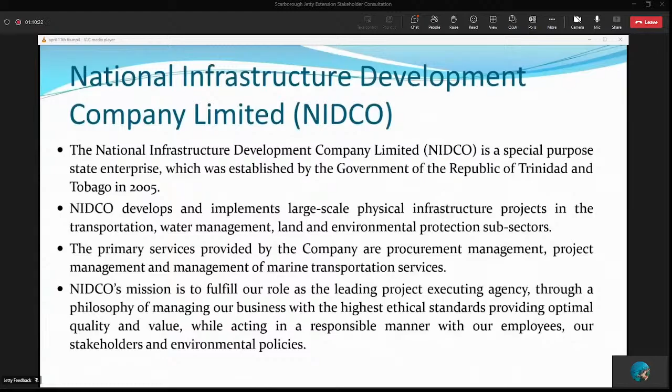Now we will present you with an introduction on the project itself. The government of the Republic of Trinidad and Tobago, through the Ministry of Works, is desirous of constructing a guide jetty at the Port of Scarborough in Tobago, in an effort to increase the berthing infrastructure at the port.

NIDCO was appointed by the ministry to act as the employer. CEP Limited was engaged by NIDCO to provide all the necessary engineering design services for the development of the conceptual designs for the guide jetty.

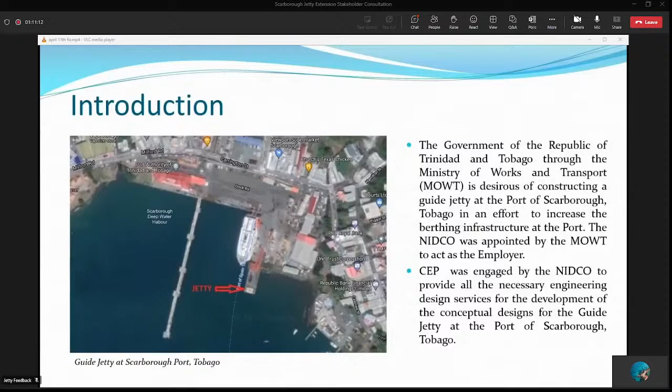Now, why are we here? The purpose of the meeting is twofold. We will be sharing information and creating awareness of the project among our key statutory and regulatory stakeholders so that we can open lines of communication with you. We're also expecting to obtain feedback, comments, and concerns from you on the proposed guide jetty at the Scarborough Port.

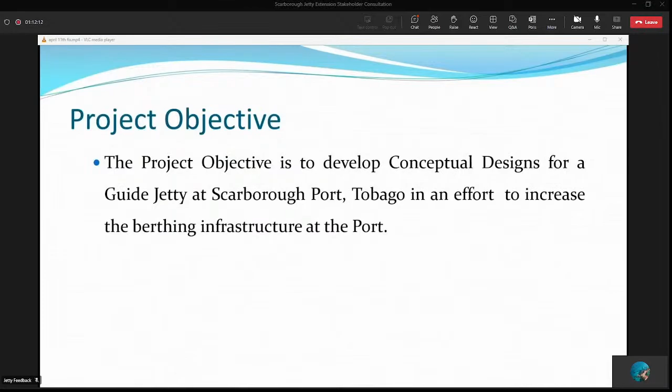Again, just a reminder of the objective for this project. The objective of the project is to develop conceptual designs for a guide jetty at Scarborough Port in Tobago, in an effort to increase the berthing infrastructure at the port.

The proposed site for this project will be at the southern end of the existing quay wall at the Port of Scarborough, which is due east of the cruise ship jetty.

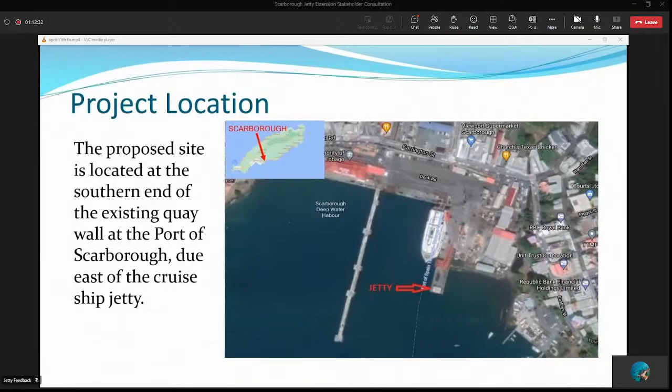Now let's look briefly at the goals of the project, which are: one, to increase the berthing infrastructure at the port; two, to provide a conceptual design for a guide jetty at the Scarborough Port; and three, to provide an assessment of all the potential environmental impacts that may occur as a result of the proposed project.

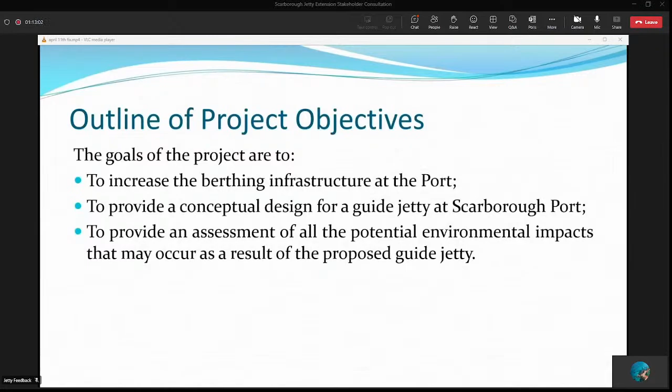And now we would like to hand over the rest of the presentation to CEP Limited. The introduction will be done by Kathryn Arjoon, who is the design consultant on the project. Good day all. My name is Kathryn Arjoon. I am the project engineer from CEP Limited.

CEP Limited was awarded the contract for the conceptual design of the guide jetty at Scarborough Port in Tobago by NIDCO. Today I will be introducing CEP Limited and its team of sub-consultants.

Firstly, I would start with giving you all a brief history of CEP Limited. CEP was founded in 1955 by a British engineer, Mr. David Key. Mr. Key decided to sell the company in 1973 to locals. Now CEP is fully owned and managed by nationals of Trinidad and Tobago.

Currently, CEP consists of project managers, civil engineers, and structural engineers who have a collective experience of over 150 years. CEP's staff consists of 33 employees: 14 engineers, 9 technical staff, and 10 administrative staff, who are all full-time employees.

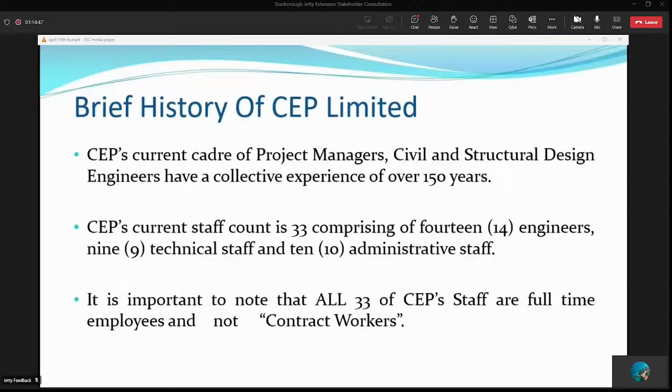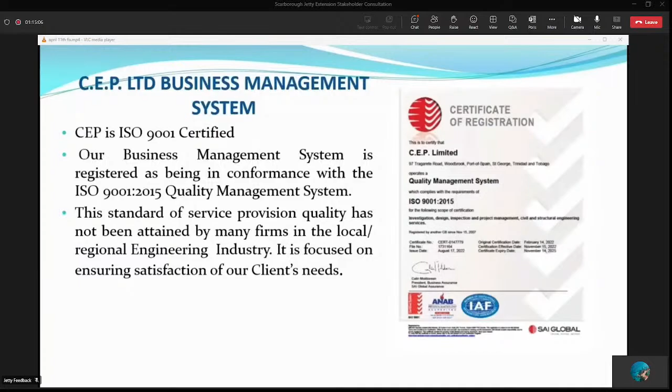CEP Limited's business management system is registered in conformance with the ISO 9001 Quality Management System, a certification which is not attained by many local/regional firms in the engineering industry. Our company is also compliant with the STOW-TT, or the Safe to Work Certificate of Conformance.

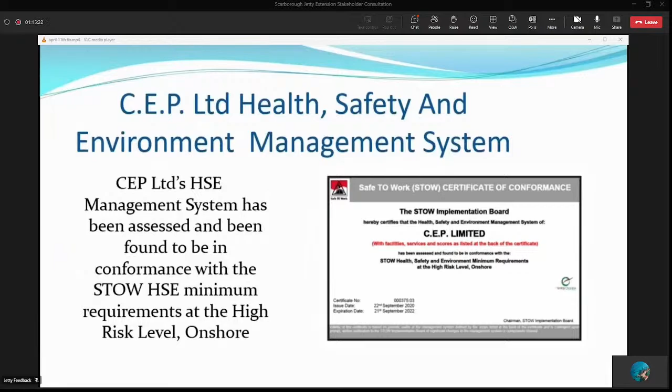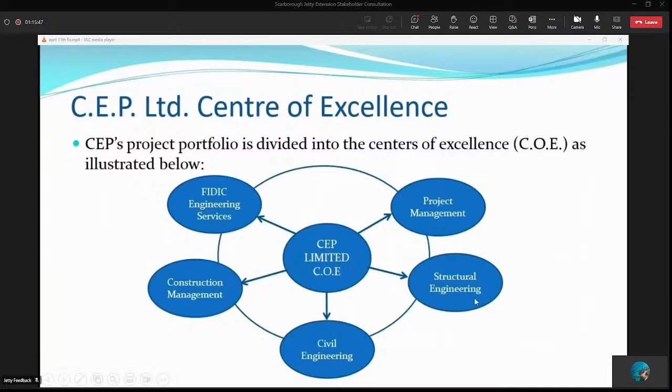So here we have a chart showing CEP's project portfolio, which details the services of CEP Limited. Currently, CEP provides the following services: FIDIC engineering services, construction management, civil engineering, structural engineering, and project management.

CEP has worked on several recent projects in the coastal engineering field. These are the Captiville Shoreline Stabilization Works, the Magdalena Grand Beach and Golf Resort Breakwater System in Tobago, and the Coastal Management Solution at Lady Hailes Avenue, San Fernando.

So now I'd like to introduce our project team for the Guide Jetty at Scarborough Port project. On this slide, you will see the organizational chart for the project. At the top of the chart, we have NIDCO, who is the employer.

Then we have CEP Limited, who was awarded as design consultant. The project director of CEP Limited is Mr. Harnarine Maharaj, and the project engineer, myself, Kathryn Arjoon.

Our team of sub-consultants include Zeeland Civil Engineering Consultancy Limited, led by Mr. Richard Flik, who is the coastal/marine engineer. We also have Morph Engineering Limited, led by Mr. Revan Ganesh, who is the environmental specialist/coastal modeler.

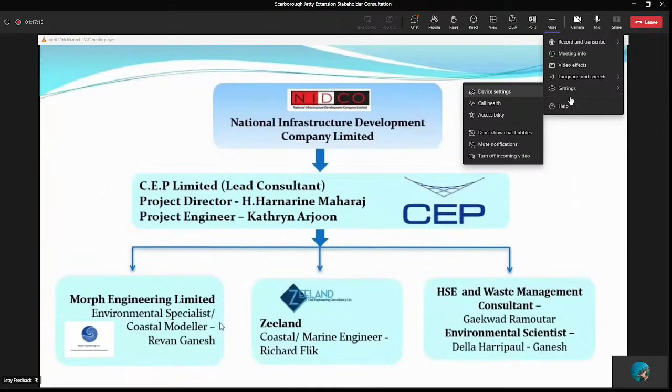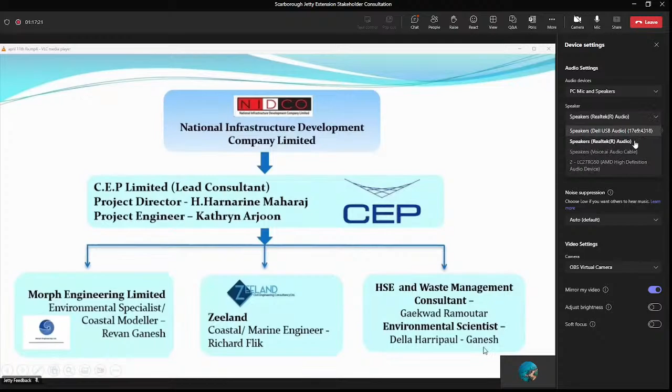We also have our HSE and waste management consultant, Mr. Gaekwad Ramoutar. And lastly, our environmental scientist, Mrs. Della Harripaul Ganesh. Now I would like to hand you over to Mrs. Ganesh, who will be presenting the stakeholder consultation process.

Good day, ladies and gentlemen. My name is Della Harripaul Ganesh, and I am an environmental scientist tasked with facilitating the stakeholder consultation process for this CEC application.

This stakeholder consultation process is being engaged via online for the most part, to reduce physical contact and gatherings as a result of the current COVID-19 pandemic. As we know, restrictions have not been fully lifted, and we are, for the most part, out of an abundance of caution, adhering to the Ministry of Health's current regulations and rules in the conduct of these public consultations.

In fulfilling the Environmental Management Authority's requirement as per item 5 of the request for further additional information, at least 2 public consultations utilizing social media and online conferences are being held, one of which is today. There were also 2 focus group meetings held, one with the relevant fisherfolk who land at the site in question, as well as the other with the Tobago House of Assembly representatives.

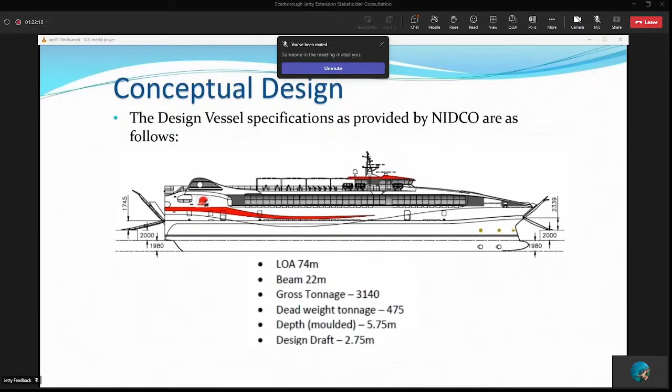The consultant team's scope of works called for the design of the marine infrastructure to facilitate a design vessel, as shown in the slide here, with an overall length of 74 meters, an overall beam or width of 22 meters, and a design draft of just under 3 meters. These specs were provided to the team by NIDCO, specifically to cater for the designs required.

So the proposed structure is actually going to be very similar to the existing cruise ship jetty just to the west. Namely, it's going to be an open pile structure with a series of berthing and mooring dolphins with intermediate walkways.

Now, unlike the existing cruise ship jetty that has a full width concrete deck walkway, we propose a narrower catwalk structure — a steel catwalk structure, which you'll see in the following slides — to span between the dolphins. Passengers will board and disembark from the stern of the vessel by the existing ferry ramp.

The main advantage of this type of structure is that it has the least interference with the existing hydrodynamic environment — waves and currents are not really affected by the piles that support the structure, given the openness.

Given the draft of the island ferry of just under 3 meters, which is about 10 feet, there won't be any requirement for dredging at the project site, as the water depths are sufficient.

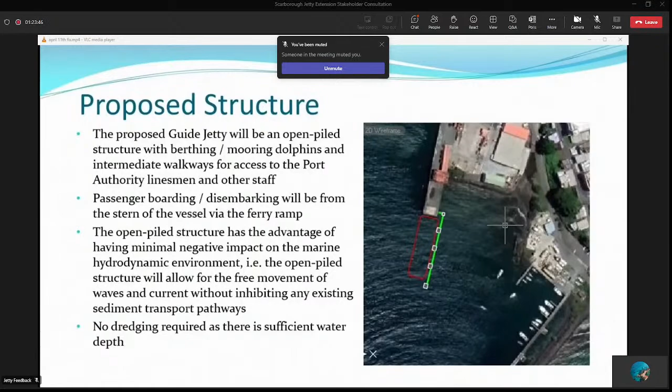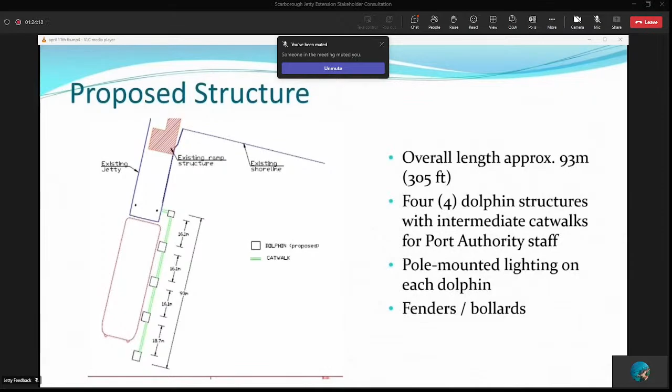So the overall length of the proposed jetty is just around 300 feet, with 4 dolphin structures with intermediate walkways that will be only for Port Authority staff and personnel when they have to moor the vessel and also to let go ropes. Each mooring dolphin will have pole-mounted solar lights and, of course, fenders and bollards.

The walkways are just accessories to allow access to port personnel. For this overall scope, we envisage a 6-month construction duration on site, and it'll be built primarily using floating equipment like a crane barge.

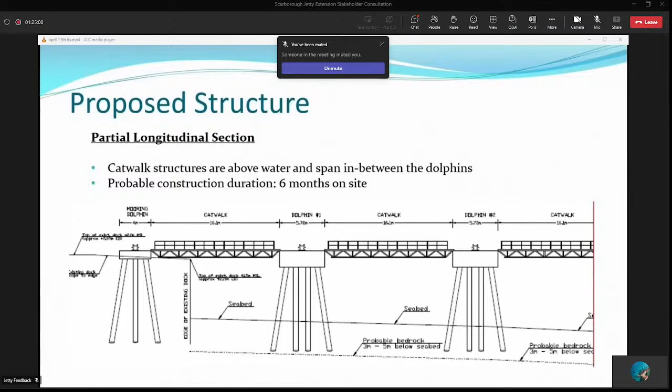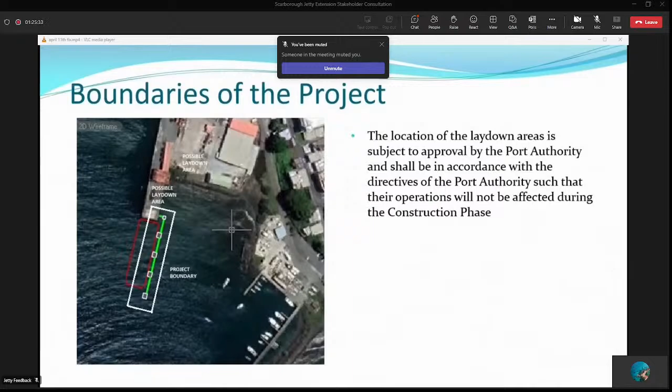The boundaries of the project are actually shown here. It's going to be very limited to the construction zone. Of course, we are aware of the Coast Guard and fishing port to the east, and also the existing port operations, which we seek to minimize interference with, of course.

So I'm just going to briefly touch on some of the construction aspects of this project. This project will be executed using floating plants and equipment, given challenges with the location of the site and access to heavy plant and machinery. Specialist equipment will be required to install the piles, using a crane barge, with on-site storage of piles and other major components done within the Port Authority compound or on the barge if additional storage space is needed.

In terms of the major construction tasks required, surveying and positioning of the pile locations would be paramount, and it's very important this be done accurately at the start of the project. Once surveys and positioning are completed, the next step is to install the piles for the dolphin structures, which will be lifted and placed via the crane barge using a piling hammer to drive it into the ground.

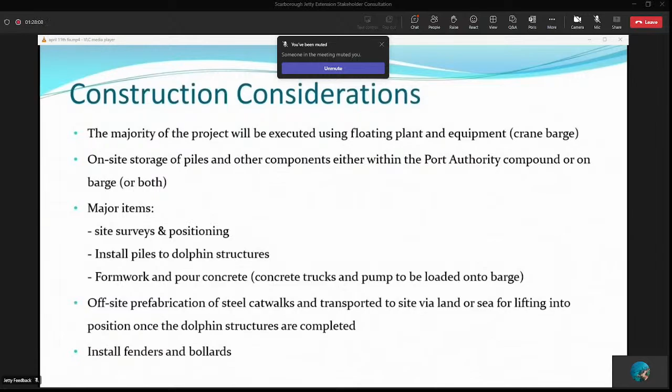Given that this project is going to be tendered out as a design build, the design builder will be required to submit his detailed methodology and work schedule prior to commencement of work, which is also a requirement of the Certificate of Environmental Clearance obtained for this project.

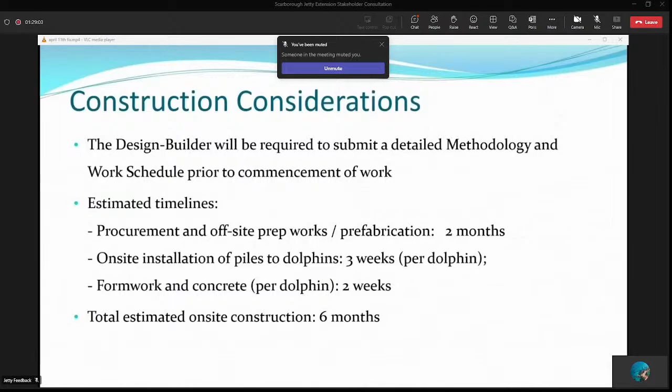In terms of estimated timelines for construction, we envisage that procurement, off-site preparation works and prefabrication could take up to 2 months. Actual on-site piling works per dolphin could take up to 3 weeks per dolphin, and there are 4 dolphins to be installed. Formwork and concrete pour-off we believe could be done within 2 weeks, with a total construction time of 6 months on site.

These images illustrate the type of equipment we expect will be used for construction of the project. The left image shows a crane barge. The right image shows a barge being used for loading the ready-mix concrete trucks onto, as well as a pump to facilitate placement of the concrete. We expect this will also be a requirement for this project.

Of course, this project will be implemented and constructed in accordance with the requirements of all statutory approvals, specifically the conditions set out in the Certificate of Environmental Clearance, the CEC, the relevant OSH guidelines and requirements, as well as safe systems of work.

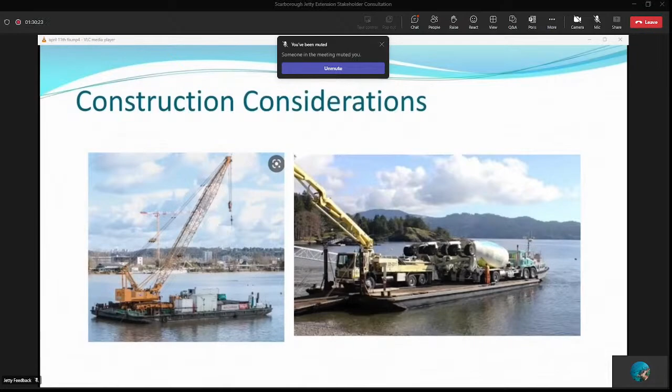Good day, everyone. I am Rivan Ganesh of Morph Engineering Limited, and today I'll be discussing the potential environmental impacts of this project, the mitigation measures to address these impacts, and some of the planned monitoring activities to take place during and after construction.

In determining the impacts for this project, we examined two major parameters: turbidity and waste management, both for the construction phase and the operations phase. During construction, some piling work is expected to take place at the foundation, which will create minor sediment plumes, noticeable on the seabed.

This will, however, have no impact on the marine life within Rockly Bay or the general port area. There will also be generation and disposal of waste material during construction, and this will be guided by our waste management plan, which will be discussed in more detail later on.

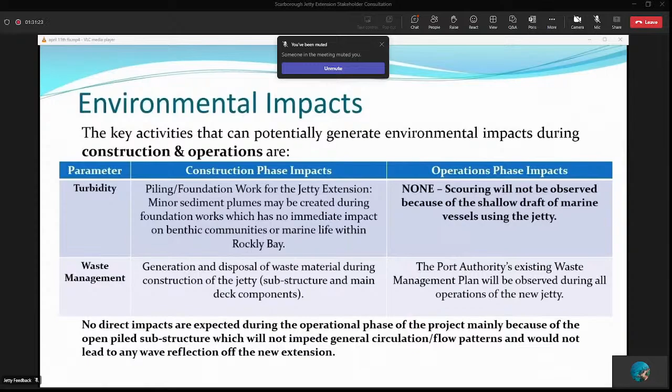We examined the socio-economic impacts of this project on the nearby port operations and the fisher folk, and determined that construction of this new jetty extension will have no negative impacts on the nearby Scarborough Fishing Depot operations or the port operations, as all marine traffic will be directly controlled by the Port Authority.

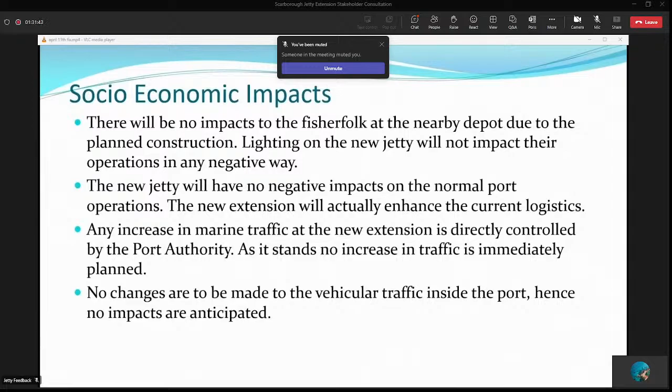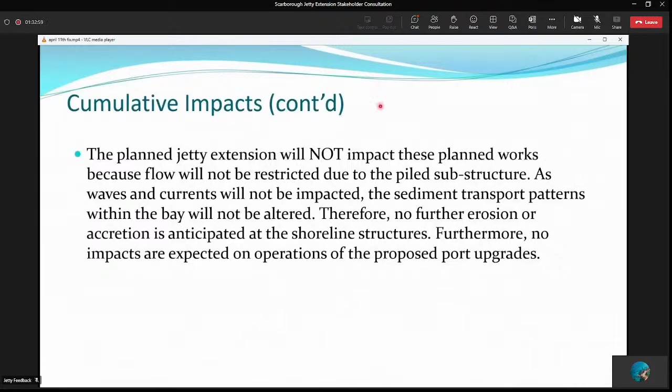Using MIKE 21, it was determined that because of the substructure design of the jetty, there will be no significant impacts on the nearby shoreline, east or west of the project. This model showed that the oceanographic environment will also remain unchanged. The new jetty extension will actually reduce the incoming wave energy on the nearby structures, and this has zero potential for shoreline sediment transport.

Therefore, no further erosion or accretion is expected because of the construction. And because no major changes to the seabed bathymetry is expected, there will exist no potential for shoreline change east or west of the site.

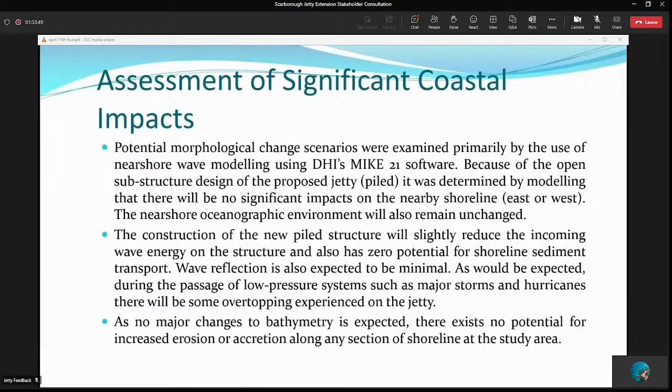In determining the mitigation measures for turbidity, we plan to implement the use of turbidity screens or silt curtains, which will be placed around the work zone. This will limit the amount of sediments entrained in the nearshore zone and reduce impacts of suspended sediments on the receiving marine environment. This method will effectively control turbidity without negatively impacting port operations or the nearby fishing depot operations.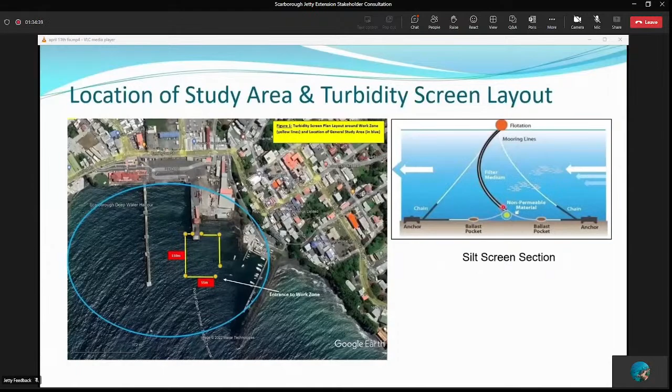During the construction phase, a detailed waste management plan will be implemented by the contractor, guided by the EMA. Guidelines will be published before construction, and all involved parties will be made aware of procedures to be followed in disposing of dangerous materials, hazardous and non-hazardous waste. It is, however, anticipated that no hazardous waste will be generated from this project and construction.

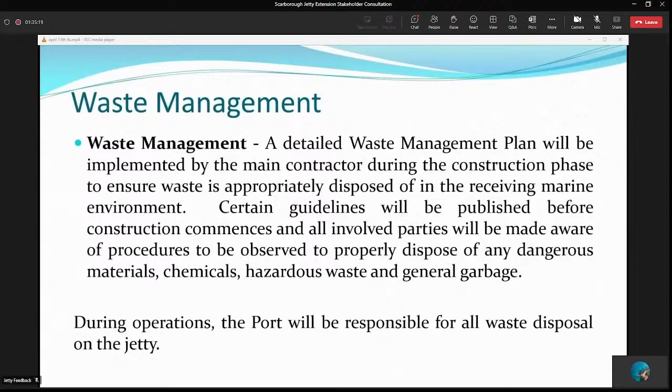During the operational phase, the Port Authority will be responsible for all waste disposal on the jetty. Specific measures in the waste management plan include ensuring responsibilities for all personnel through proper induction by HSE officers on site, ensuring compliance with EMA permits, and proper understanding of the type of work being conducted. HSE officers will also ensure proper storage of waste with minimal environmental impact by providing properly labeled bins, and the contractor should ensure proper disposal of waste through licensed contractors only.

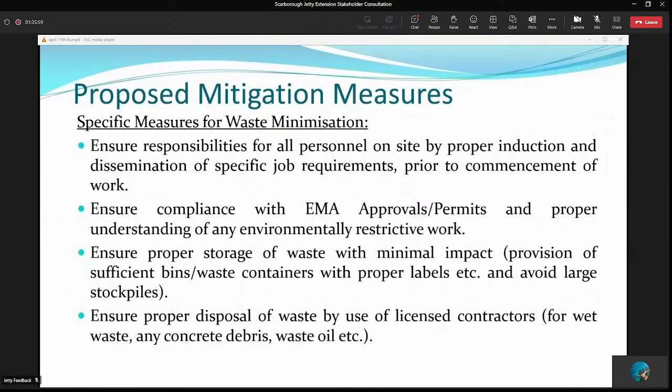During construction, turbidity will be continuously monitored on a weekly basis at the construction zone using TSS, or total suspended solid, probes, ensuring turbidity levels remain within acceptable limits per EMA water pollution rules. Turbidity will be measured at two locations, one up current and one down current, and compared to baseline levels measured before construction. This will be done by HSE officers on the employer's team, who will be responsible for monitoring and reporting any non-compliance to all parties involved.

Also, prior to construction, two baseline beach profile stations will be established on either side of the port. These will be compared to post-construction profiles, measured monthly for at least a 3-month period, helping to assess any morphological changes to the shoreline.